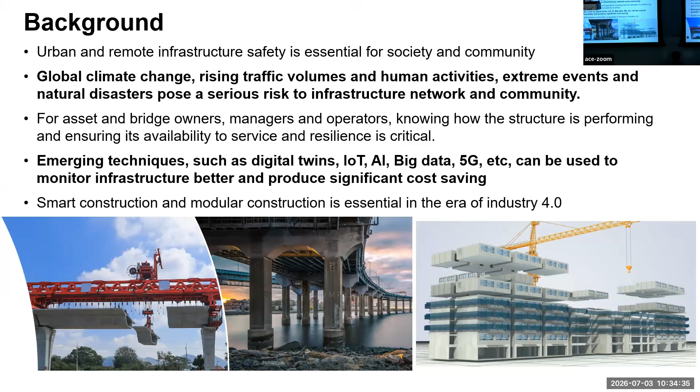As you may be very aware, urban and remote infrastructure safety is particularly important for society and the community, and with current challenges such as global climate change, rising traffic volumes, human activities, extreme events and natural disasters, these pose a very serious risk to our infrastructure network and the community. So in recent years, with the development of new AI, vision, and other techniques, we have much more powerful techniques for monitoring infrastructure safety, and those techniques can produce significant cost savings.

But this bridge collapsed after a flood in 2023, a 1 in 100-year flood. So that is the impact owing to climate change, because when this bridge was designed, they would not expect such frequency or occurrence of extreme events. And for larger bridges, we also expect larger effects, for example, heat waves, growing storms and strong winds, or accelerated deterioration from the ocean environment. Those pose significant challenges for maintaining and protecting infrastructure safety.

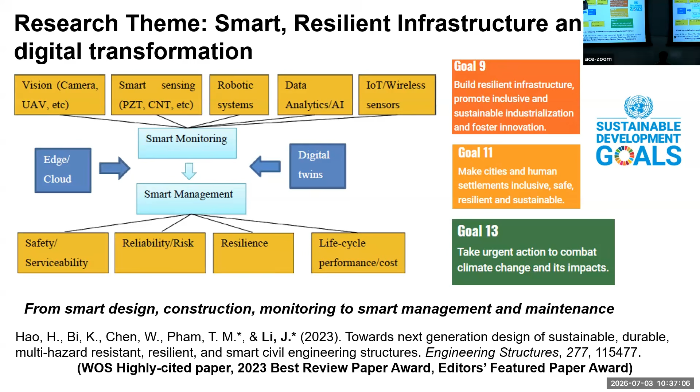So some particular and specific challenges I would like to talk about today are these. For example, how can we develop and apply those techniques I mentioned, for example, IoT sensing, vision, AI, for real-world applications in structural health monitoring? How can we obtain meaningful and high-quality data if we want to reliably use AI methods in particular applications in structural health monitoring? And how can we develop cost and computationally effective AI methods for those large-scale infrastructure applications, because we know many AI methods need a large amount of resources and computational demand.

And how can we develop scalable techniques for effective applications to a population of structures? That means we could not only monitor one specific individual structure, but also extend to a range of different structures in a region or in an area, but at a reasonable cost.

So first, I talk about some computer vision methods. In the last few years, we have developed computer vision techniques using static cameras, for example two static cameras, one static camera, or UAV, for measuring structure vibration displacement. This includes two-dimensional and three-dimensional displacement measurement, and we can apply AI methods to track the key points in the images and match those key points in the video images to obtain accurate and minor structure vibration displacement. Based on those measurements, we can do modal identification and condition monitoring, and we have validated our techniques on some real bridges for engineering applications.

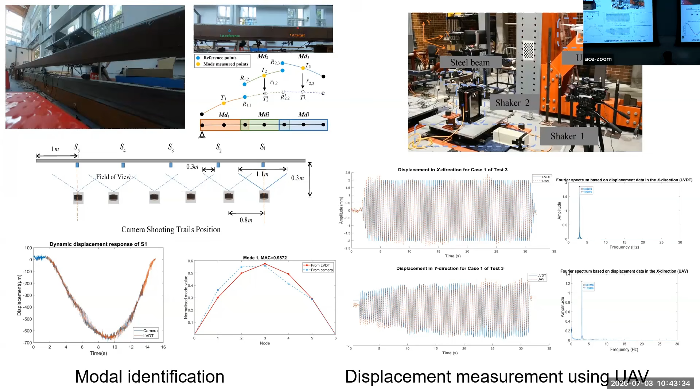Later this year, we further developed a deep learning-based motion magnification for minor displacement measurement. That means now we use AI techniques to define and improve the parameter settings and improve the performance of motion magnification. Traditionally, motion magnification techniques need a specific frequency to amplify, so you need to define the frequency range of the structures in the video you need to amplify. But with these AI techniques, we don't need to do that. And we can also improve the blurring and distortion effects in the video images.

So that means with less input to the AI model, we don't need prior knowledge of the frequency range for the motion magnification. And these techniques can also improve the motion magnification results when dealing with blurring and distortion effects in the video images. So that is the idea of these measures. And we also did some tests in the lab.

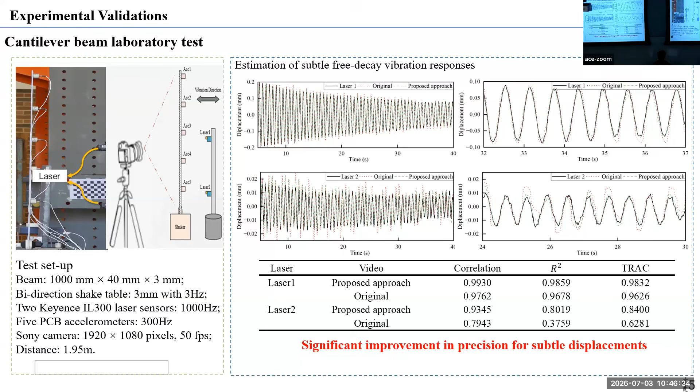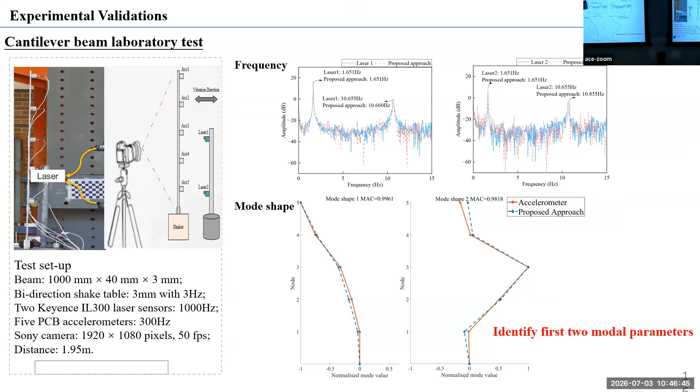So if you zoom in on those responses, you will see quite accurate displacement can be obtained in those cases. So that demonstrates the improvement of this AI-enabled motion magnification technique's accuracy. And for the modal identification, very accurate natural frequencies and mode shapes can be obtained from displacement measurement.

So that is another study. We simulate a vehicle traveling on a bridge. So we use the camera to record the vibration video of this structure when it is subject to this vehicle loading. And we simulate different lighting conditions. For example, in normal lighting conditions, you will see some structure features on the image. For example, these are some bolts in this area on this structure. You will see that relatively clearly.

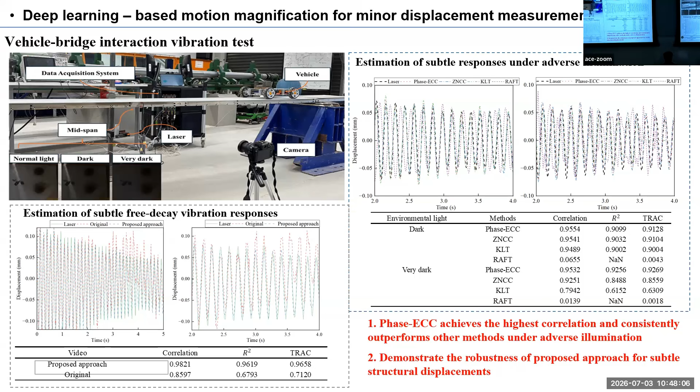And we simulate the dark and the very dark conditions. So in dark conditions, it becomes more difficult to see very clear features and the bolts on these structures. But with our developed techniques, we can still quite accurately measure the displacement even at the scale of 0.1 millimeter. So that demonstrates the accuracy and the improvement of those techniques under very dark lighting conditions.

So this is a study where we demonstrate how we can use this vision-based technique for condition monitoring. So this is also the same structure we used in the last test. This is a vehicle loading, and that is a bridge. We simulate different damages by loosening some bolts in this bridge model, and we did that moving load test.

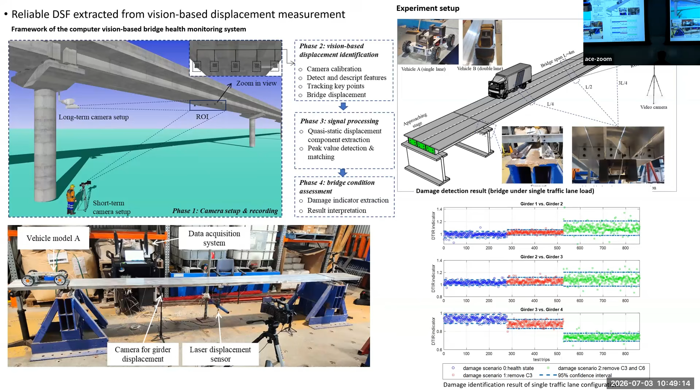We record the videos, and then based on this, we define some damage indicator to indicate the condition change in the different girders. So observing those statistical outliers and damage indicators, we can identify the condition change in the structures based on this vision measurement. So that tells us the information about the structure condition from the vision-supported sensing technique.

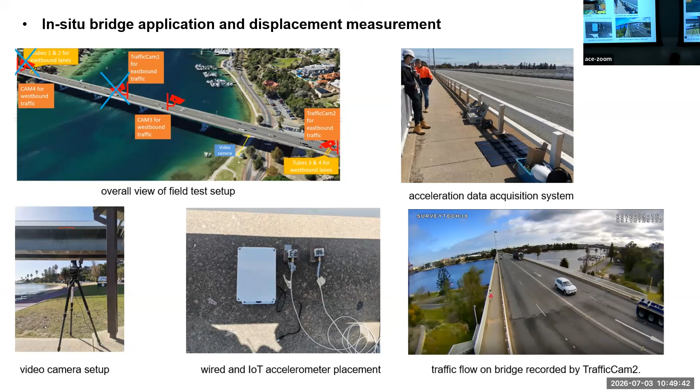Also, we did some studies on real highway bridges in Perth. So this is a continuous bridge in Fremantle. We set up cameras and some fixed sensors, traffic cameras on the bridge to monitor the traffic flow on the bridge. And we use these cameras to look at the specific area of the bridge to obtain the vibration displacement of this bridge.

So we use some features on the bridge itself to serve as key points, and we track the movement of those key points in different frames of this video, so that we can get the vibration displacement continuously during the video from the camera. So those are some typical results we get under different traffic loading conditions.

So we can observe that there is a significantly large displacement, for example, 8 mm, when there is relatively high traffic loading across the bridge, and also for some larger traffic loading scenarios as well. So we can use this to test the allowance of the bridge deflection under certain heavy loading conditions.

This will provide some information to the bridge management authorities to understand the deflection, the maximum deflection they can observe under different loading conditions, especially those heavy traffic loading scenarios. And they can check that with the design guidelines to see whether that's still within the limit of the bridge deflection allowance.

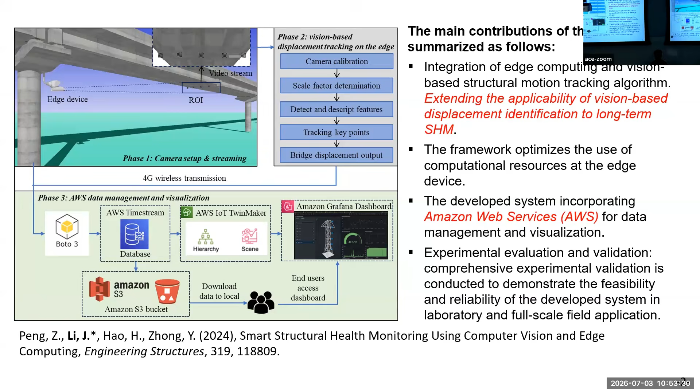You can transfer this key information to the cloud. So we use Amazon Web Services to build a digital twin model on the cloud. So you can access the data from anywhere on the internet. For example, in your office, to look at the bridge information collected from this device. So you will see the vibration responses and some further analysis results if you want. And also you can look at the conditions of this device itself. So those can be used to generate any report if required for the users.

So that is the hardware we used for this idea. So this is an NVIDIA edge device. Originally, we used Jetson Nano. Now you have much better hardware, so we also upgraded this as well.

And we can connect cameras to this edge device, like this. And this is a power supply. Of course, you can use a portable power supply, or you can use larger power resources. This can be used to supply the power to the camera and to the edge device. And we use a 4G module to transmit the data to the cloud, so that we can have immediate feedback of the structural responses or conditions, and those are accessible from the internet.

So those are some specifications of this hardware, and also the cost is totally less than 1,000 Australian dollars. So this provides a relatively affordable and cost-effective system to measure the responses of the structures, provide the data, and connect the device to the internet, to the cloud, and also provide a dashboard for users or owners to manage their system.

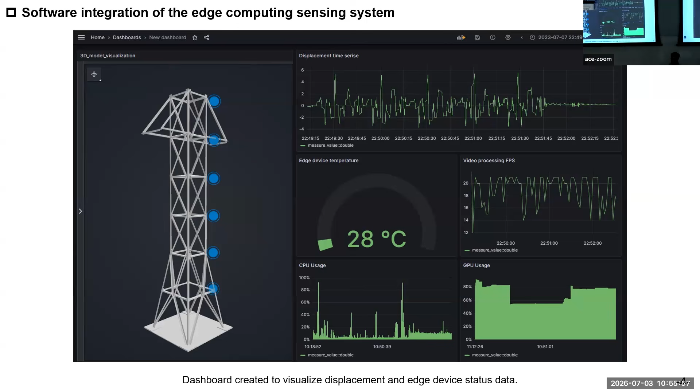And then if you want to further develop, you can develop some signal or data analysis processing modules on this to process those measured data.

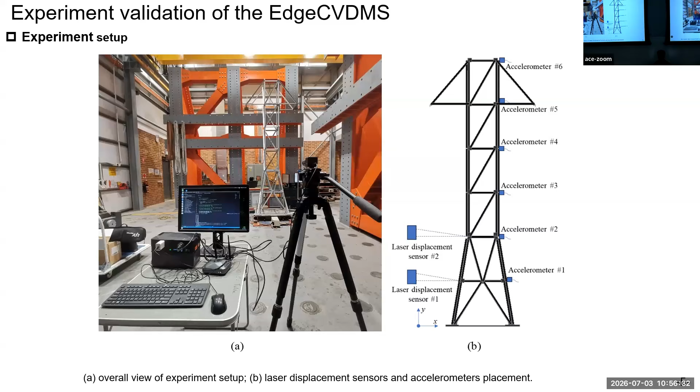So this is a validation in the lab. That is the tower structure I just showed in the dashboard. And we installed some cameras and some laser displacement sensors to serve as the baseline information. And this is our device. So we try to look at those locations and validate whether we can get very accurate displacement compared with those laser displacement sensors. So that tells us the accuracy and the performance of our device and the method.

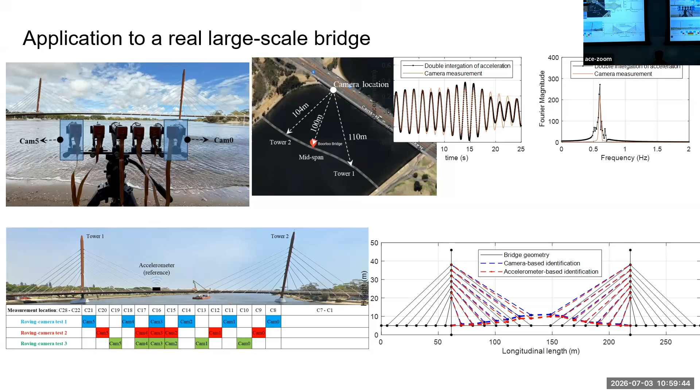So we can measure their displacement, and we use that measurement information to identify the natural frequencies and the mode shapes of those structures. And so these are our results. You can see, based on the ground truth and based on our approach, we can identify quite accurate and consistent results compared with the traditional accelerometer-based results. So that demonstrates the feasibility of using these methods and the device for real bridge monitoring.

So next, I will talk about some AI techniques for structural health monitoring, particularly on using and developing generative AI techniques for crack detection, and also some larger applications or development in structural damage identification or data processing and so on. So that is something I would like to talk a little bit more on in this part on AI applications.

So the idea is pretty straightforward. We use a large language model to generate effective and accurate prompts, and we use diffusion models to generate crack images. That solves the problem that in some real structural health monitoring crack detection areas, we don't have a sufficient number of high quality images of cracks on different types of structures. So by using these generative AI techniques, we can significantly enlarge the training data size. And also we can improve the diversity and the balance of the data set. And this will improve the crack detection performance. And based on this, we can do further crack segmentation.

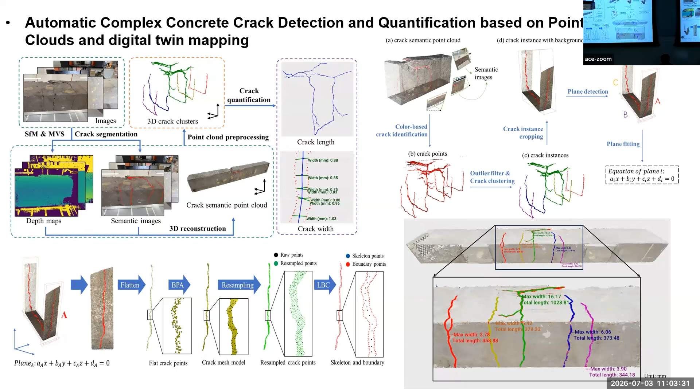So for example, for a beam structure in the lab with many different cracks, based on this point cloud model and AI methods, we can not only detect the cracks, but also segment the cracks and provide the width of the crack and the total length of the crack. So those are some results on crack detection and quantification.

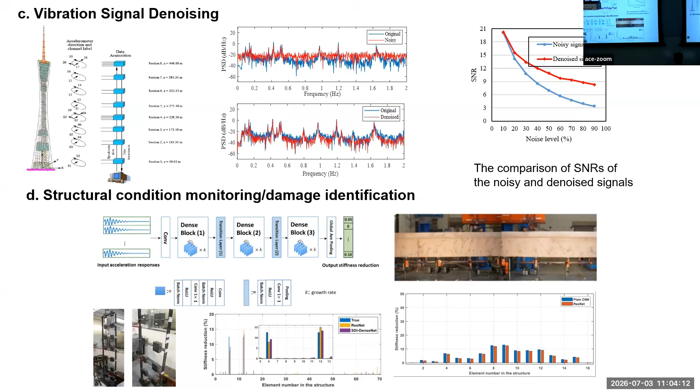These are some of our previous studies. I will probably go through this quickly because this was published a few years ago. We have applied AI techniques for lost data recovery in wireless transmission. We can recover the lost data in the transmission process, and we can use these AI techniques to do response reconstruction, signal denoising, and structural damage identification, so we can identify the damage pattern and the damages in this area.

So the next and probably the last topic I want to talk about is the drive-by methods. I will probably use another 5 minutes and leave some time for discussion.

So this is an IoT sensing method, and we developed it along with the drive-by techniques. The idea is we install the IoT sensor on vehicles, and we use these vehicles to cross a large number of infrastructure, for example, bridges and roads in the city, in the area. So we collect the IoT sensor information, including vibrations, GPS and other information, and even cameras if you want. Then we transmit this data to the cloud for further processing. And we try to make use of this information to monitor regional level infrastructure conditions, including bridges and roads.

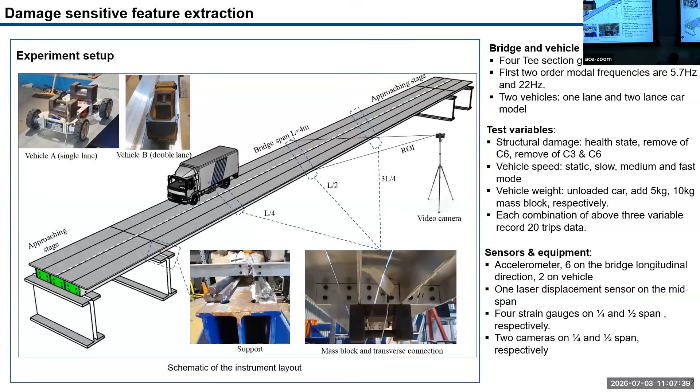And further on, we try to develop those techniques for bridge monitoring. We developed AI methods based on knowledge distillation, and we can identify the useful information from drive-by measurements. So we set up a database. We conducted a large number of repeated tests by simulating different damage scenarios and different vehicle loadings on this bridge. And we collected a large amount of data, including accelerometers, laser displacement sensors, strain gauge responses, and cameras. So this provides a test bed for our studies.

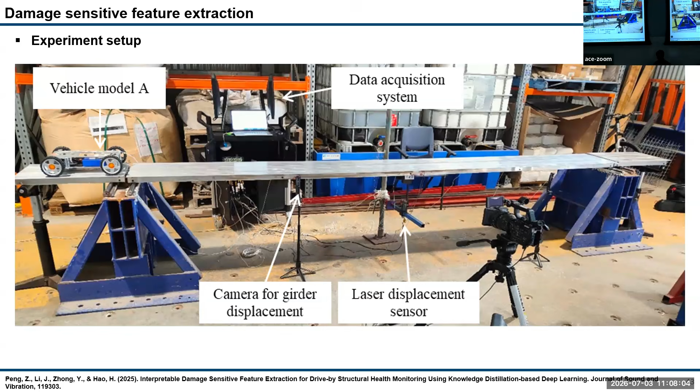We can have a large training data set for drive-by sensing when the bridge is subject to vehicle loadings, and we have the responses from the bridge. We have the video camera to record video and images. So we can do this test to verify whether we can use AI techniques to interpret the data we collected from this test bridge.

So that is a quick summary of my recent work and some recent developments. I don't want to repeat the conclusions, but I really hope we can have more applications and validations on real-world engineering structures, and I hope our techniques can apply not only to individual structures, but also to regional scale monitoring in a city or a large community.